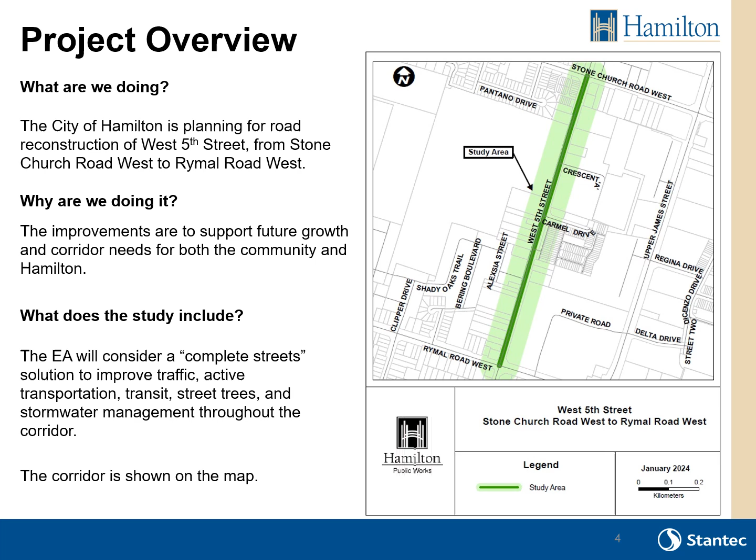The EA will consider a complete streets solution to improve traffic, active transportation, transit, street trees, and stormwater management throughout the corridor. The map shows that the study area corridor is West 5th Street from Stone Church Road West to Rymal Road West. For the purpose of this PIC, we will refer to the corridor as West 5th Street.

The Municipal Class Environmental Assessment, or EA process, is a 5-phase planning process that is approved under the Ontario Environmental Assessment Act. All municipalities in Ontario are required to complete a Municipal Class EA when planning major infrastructure projects.

This project is being planned as a Schedule C project, which means it includes Phase 1 through Phase 4 of the EA planning process. Following the EA, the project would proceed to Phase 5 implementation.

These phases of the EA process are summarized. Phase 1 includes reviewing background planning and policy documents and identifying the problem or opportunity. Phase 2 involves completing inventories of the existing conditions. Alternative solutions are evaluated and a preferred solution is identified.

Phase 1 and 2 were discussed at the first PIC, held on January 16, 2025. We are currently in Phase 3 of the study. This PIC includes identifying the preferred alternative designs, which are alternative ways of implementing the preferred solution.

In Phase 4, we will document the decision-making process in an environmental study report. Continuous stakeholder engagement is part of the EA process, and comments or questions are encouraged at any time.

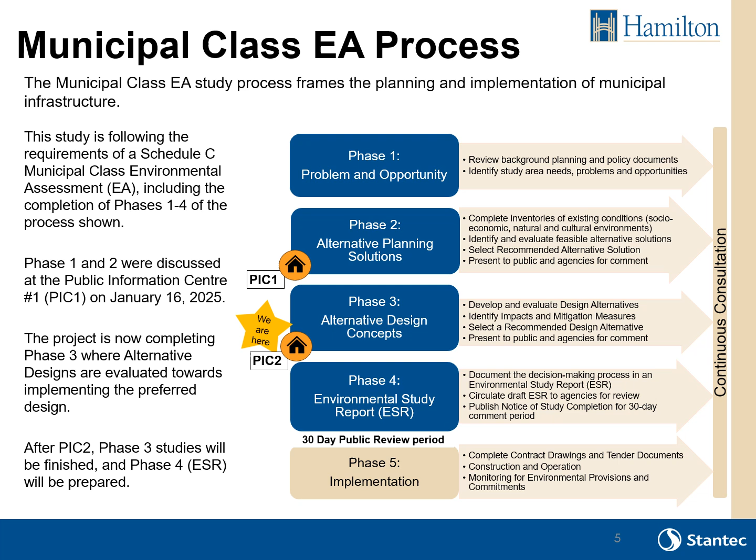The study includes opportunities for public input, including 2 public information centers, and a 30-day review of the environmental study report at the end of the project.

The problem and opportunity statement is developed to provide an overview of the issues to be addressed, as well as potential outcomes that may be achieved. There are 2 primary issues that need to be addressed.

West 5th Street from Stone Church Road West to Rymal Road West is currently a rural cross-section road surrounded by urban growth.

The study area has inadequate transportation infrastructure to accommodate transportation needs, with discontinuous sidewalks and no cycling facilities. Previous studies have indicated a desire to reconstruct the street within the study area.

The segment of West 5th Street is experiencing significant neighborhood changes from the recently built William Connell Park as well as newer, higher density developments. Improvements to West 5th Street are required to accommodate existing and future transportation needs for pedestrians, cyclists, transit, and vehicles.

This presents an opportunity for the city to address the above infrastructure needs and accommodate additional modes of transportation within the corridor. The city is seeking alternatives to implement a complete streets approach to enhance multimodal transportation, improve safety, stormwater management, increase tree canopy coverage, and support economic, social, and cultural connectivity in this rapidly evolving area.

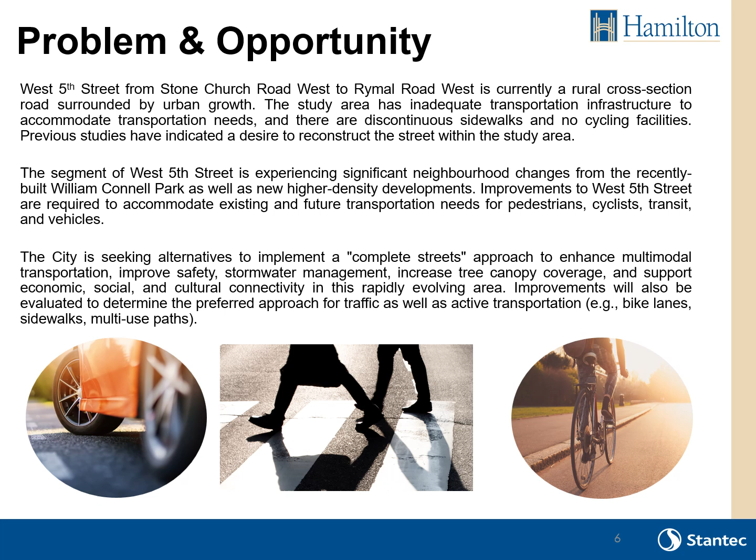Improvements will be evaluated to determine the preferred approach for traffic as well as active transportation. The following alternative solutions were carried forward for further consideration in Phase 3 of the Class EA process and evaluated using the factors and criteria presented.

Operational improvements: implement localized measures to improve transit, active transportation, and roadway improvements to optimize accessibility and safety. These can include cycling lanes, sidewalks, and strategically located mid-block crosswalks/cross rides. Improve West 5th Street.

Widen/enhance West 5th Street to include a continuous 3-lane cross-section or intermittent left turn lanes to improve traffic operations and safety given future travel demand. Update an urban cross-section with storm sewers.

The right-of-way would be designed to accommodate pedestrians, cyclists, transit vehicles, and commercial vehicles. An example of West 5th Street north of Stone Church Road is shown. A conceptual cross-section will be developed in Phase 3 and 4 of the EA process. The addition of street trees will also be reviewed in conjunction with design elements such as sidewalks and utilities.

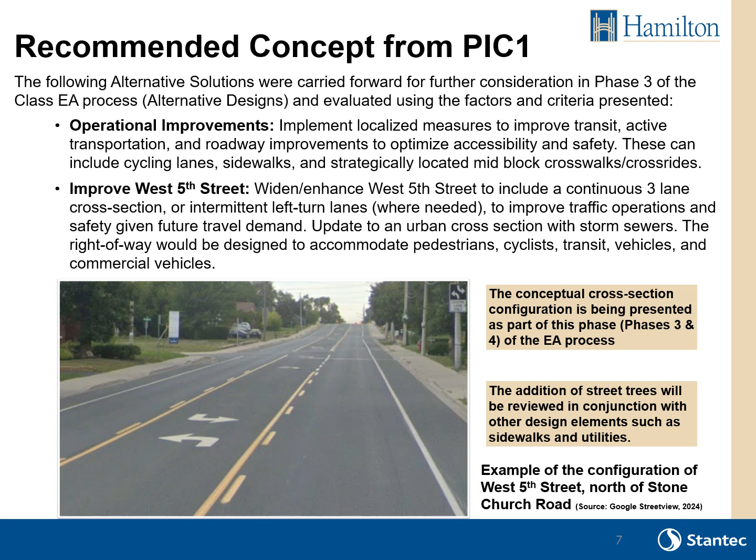To accommodate the additional demand, design strategies from the City of Hamilton's Complete Streets Design Guidelines may be adopted in the future design of this corridor. The Complete Streets concepts seek to incorporate roadways for cars as well as cycling and pedestrian infrastructure.

Complete Streets concept considerations include physical and operational design elements. Physical design elements consist of road lane width and alignment, transit stop locations and amenities, active transportation facilities location, width, and type, drainage and stormwater management improvements, street lighting, street trees and landscaping opportunities, and construction staging.

Operational design elements consist of turning movements, access and signal timing, and intersection accessibility opportunities. Alternatives have been developed and evaluated for West 5th Street as part of this study. The proposed cross-sections include the addition of a 2-way left turn lane, as evaluated at PIC 1.

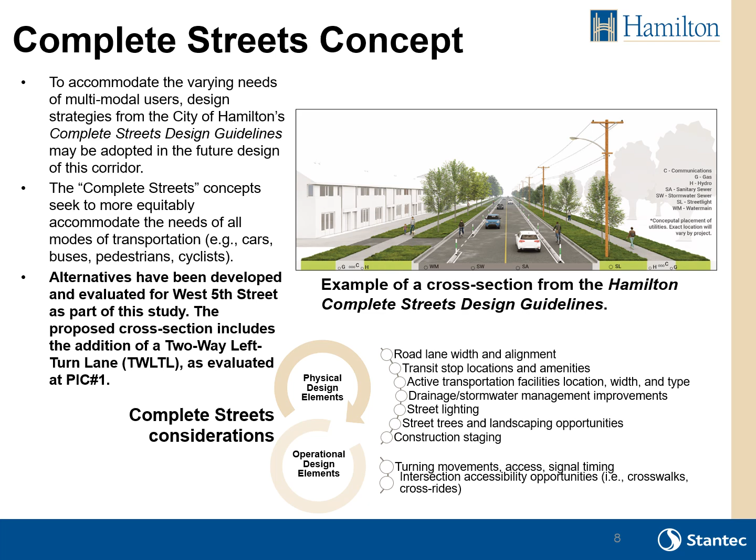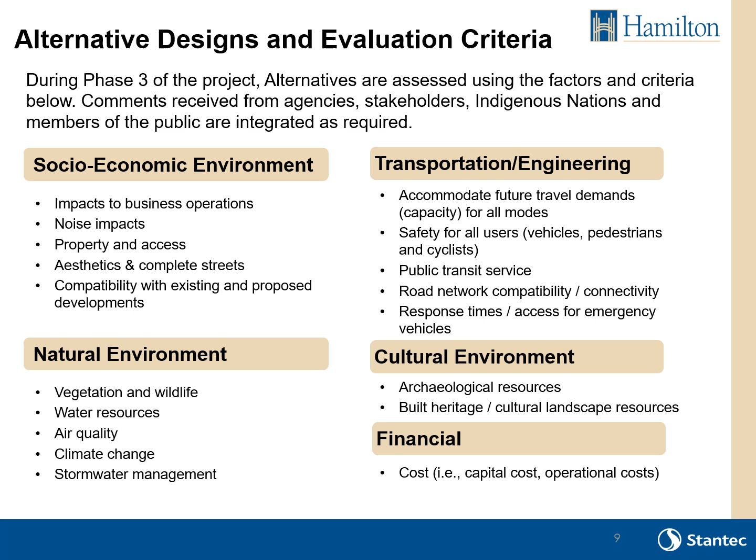During Phase 3 of the project, alternatives are assessed using factors and criteria at the alternative design phase. Comments received from agency stakeholders, Indigenous nations, and members of the public were integrated as required. Categories include socioeconomic environment, natural environment, transportation and engineering, cultural environment, and financial considerations. Various sub-factors are shown which will help expand upon these categories and address the EA requirements.

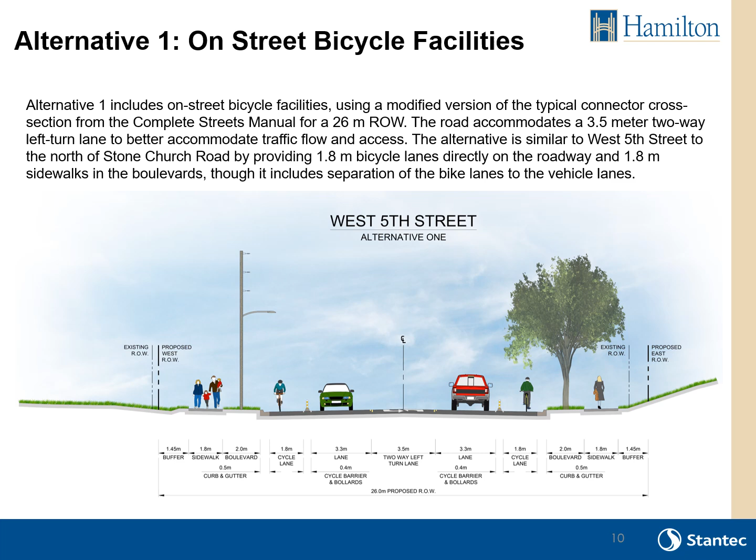Alternative 1: On-street bicycle facilities. Alternative 1 includes on-street bicycle facilities using a modified version of the typical connector cross-section from the Complete Streets Manual for a 26-meter right-of-way. The road accommodates a 3.5-meter 2-way left turn lane to better accommodate traffic flow and access. The alternative is similar to West 5th Street north of Stone Church Road, providing 1.8-meter bicycle lanes directly on the roadway and 1.8-meter sidewalks in the boulevards, with separation of the bike lanes from the vehicle lanes.

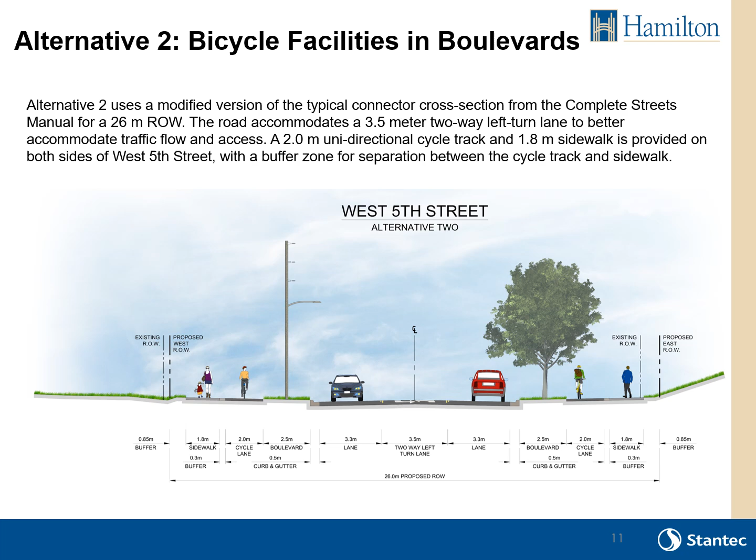Alternative 3, multi-use pathway on both sides of West 5th Street, includes a modified version of the typical connector cross-section from the Complete Streets Manual for a 26-meter right-of-way.

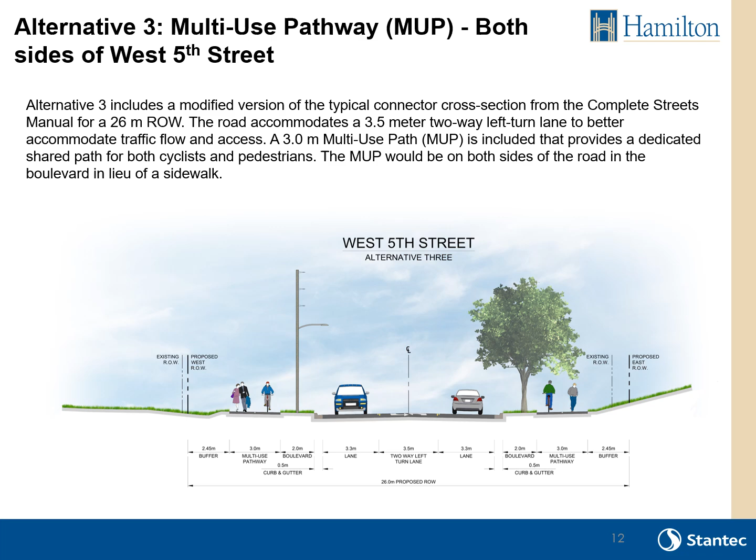The road accommodates a 3.5-meter 2-way left turn lane to better accommodate traffic flow and access. A 3.0-meter multi-use path is included that provides a dedicated shared path for both cyclists and pedestrians. The MUP would be on both sides of the road in the boulevard, in lieu of a sidewalk.

Alternative 4, multi-use pathway and sidewalk. Alternative 4 features a modified cross-section from the Complete Streets Manual for a 26-meter right-of-way, incorporating a 3.5-meter 2-way left turn lane to improve traffic flow and access.

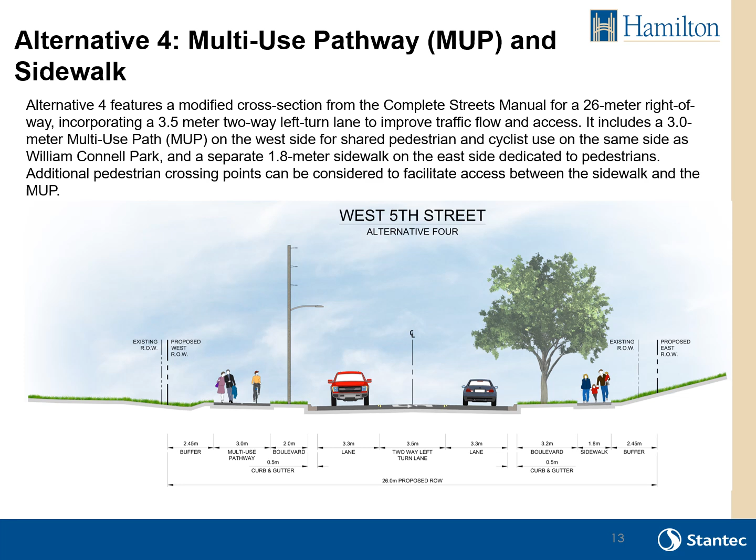It includes a 3.0-meter multi-use path, MUP, on the west side for shared pedestrian and cyclist use, on the same side as William Connell Park, and a separate 1.8-meter sidewalk on the east side dedicated to pedestrians. Additional pedestrian crossing points can be considered to facilitate access between the sidewalk and the MUP.

The following alternative designs were compared to assess their ability to address the problems and opportunities identified within the study area. A summary table is provided on this slide showing the 4 alternatives as a comparative evaluation.

Alternative 4, multi-use pathway and sidewalk, is selected as the recommended active transportation alternative for the following reasons. It increases connectivity to William Connell Park for cyclists and pedestrians, and provides the safest and most inclusive option for all users, physically separating cyclists and pedestrians from vehicle traffic and each other.

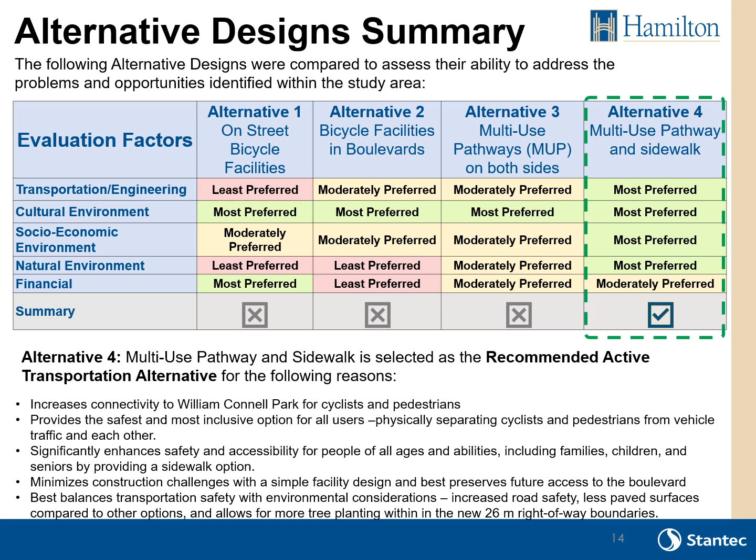This significantly enhances safety and accessibility for people of all ages and abilities, including families, children, and seniors, minimizes construction challenges with a simple facility design, and best preserves future access to the boulevard. It best balances transportation safety with environmental considerations: increased road safety, less paved surface compared to other options, and allows for more tree planting within the new 26-meter right-of-way boundaries.

Natural environment mapping was reviewed. Fieldwork occurred in October 2024. Further investigations are ongoing in spring/summer 2025 and will be incorporated into the ESR. Impacts and mitigation measures are being assessed with the proposed 26-meter right-of-way.

Other investigations: a built heritage checklist will be included in the ESR. Stage 1 archaeology assessment is completed. Stage 2 investigations are recommended for detailed design.

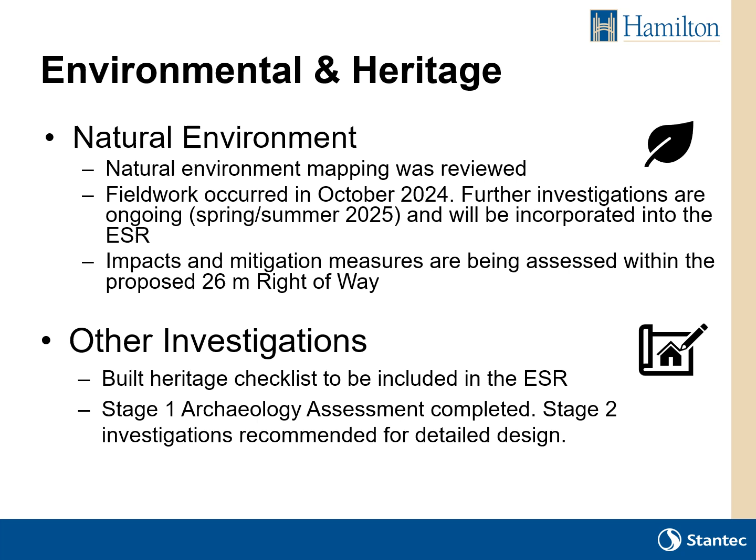Impacts resulting from this project will be minimized to the extent possible. Preliminary mitigation measures have been identified and will be further refined in the environmental study report and during detailed design. Investigations are ongoing and will continue to help confirm environmental impacts, refine mitigation measures, and support obtaining required permits and approvals.

Natural environment: species surveys are being undertaken to identify wildlife present within the study area. Impacts to the existing natural environment will be minimized to the extent possible. Temporary barriers to avoid wildlife interactions will be installed during construction.

Utilities: utility conflicts with the preferred solution will be determined. Relocations or mitigation measures will be completed in advance of construction through consultation with individual utility organizations.

Noise impacts: the potential changes in traffic noise associated with the preferred solution are currently being reviewed. A noise assessment is being completed to determine if measures are required.

Tree impacts: appropriate erosion and sediment controls will be used, and temporary barriers to avoid unnecessary tree clearing will be installed during construction. Future tree plantings are considered in detailed design where space permits.

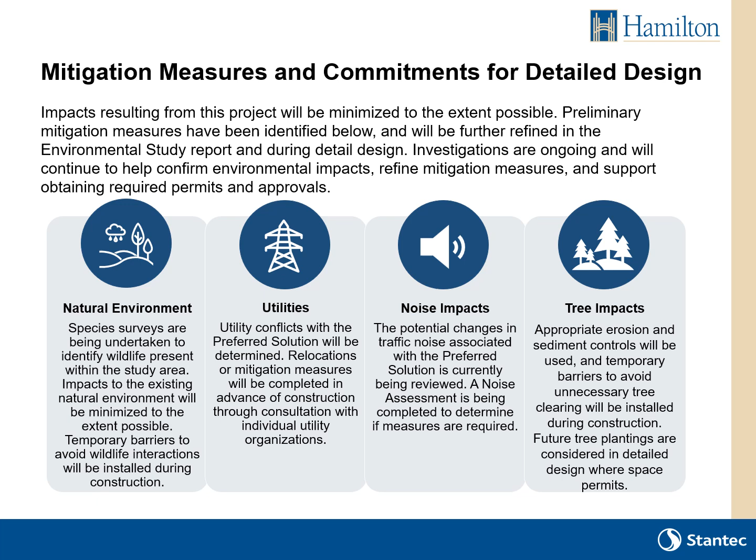Following this PIC, the project team will complete the next steps: review and respond to comments received at this PIC, confirm the preferred design, and complete remaining technical studies and prepare the ESR.

There will be a 30-day public comment period, during which comments received will be reviewed and responded to. After these steps are done, the project may proceed to detailed design.